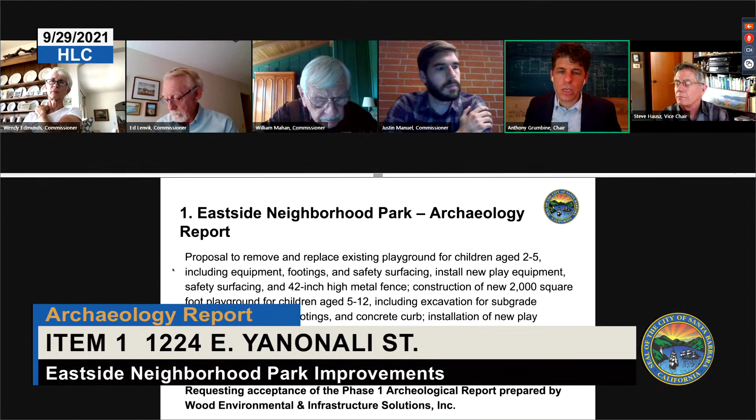This is Eastside Neighborhood Park Archaeology Report. This is a proposal to remove and replace the existing playground for children aged 2 to 5, including equipment, footings, and safety surfacing. Install new play equipment, safety surfacing, and a 42-inch high metal fence. Construction of a new 2,000 square foot playground for children aged 5 to 12, including excavation for subgrade preparation, concrete footings, and concrete curbs. Installation of new play equipment, safety surface, 42-inch high fence, installation of youth adult fitness equipment, installation of permeable concrete paved walkway, removal of chain link fencing and replacement at a new location, and irrigation system improvements. This is requesting acceptance of the Phase 1 archaeological report prepared by Wood Environmental and Infrastructure Solutions, Inc.

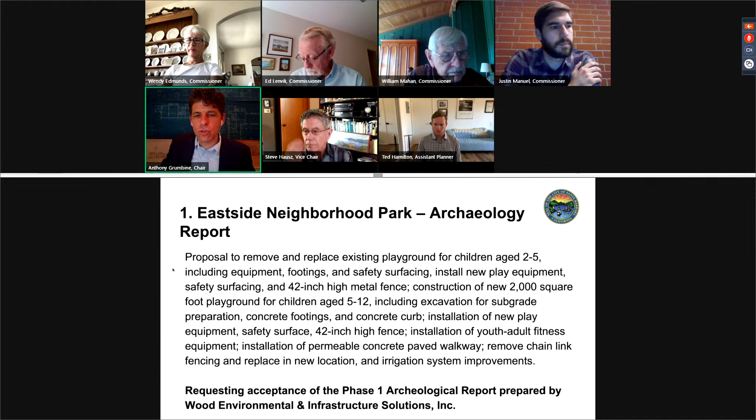All right, so with that, Commissioner Manuel. Yeah, sorry, I have to recuse myself for a conflict of interest with the owner. Okay, thank you. All right.

Mr. Hamilton, do we have the applicant here? Mr. Chair, yes, we do have the applicant here for questions. I don't know if the report preparer is here currently, but the applicant may be able to tell us. I just wanted to note that the overall project will be reviewed by the ABR, and that Dr. Glassow reviewed the report and agrees with its conclusions and recommendations. Thank you.

All right, thank you. And if someone from the applicant team that is here wants to chime in or come on. All right, and if you would introduce yourself for the record. Good afternoon, Commissioners. Denise Johns, Associate Planner with the City's Parks Department.

Okay, thank you. So did you want to, well, welcome, and did you want to give a quick summary of the report findings, and then we can go to public comment, and then we'll come back to the commission for any questions for a motion.

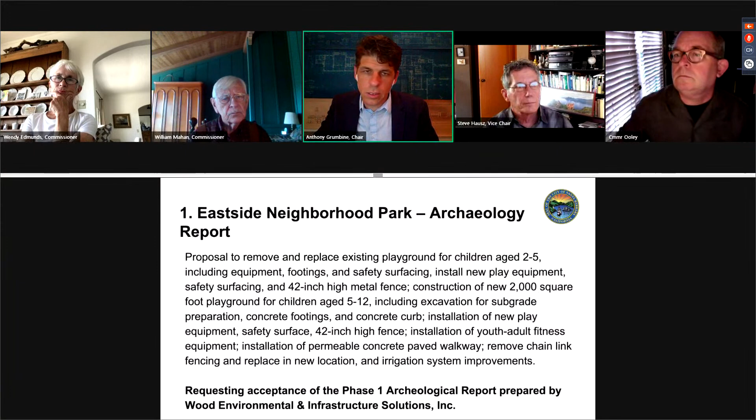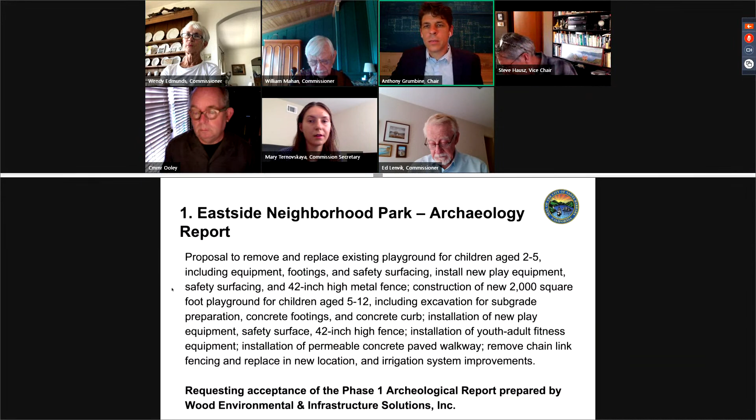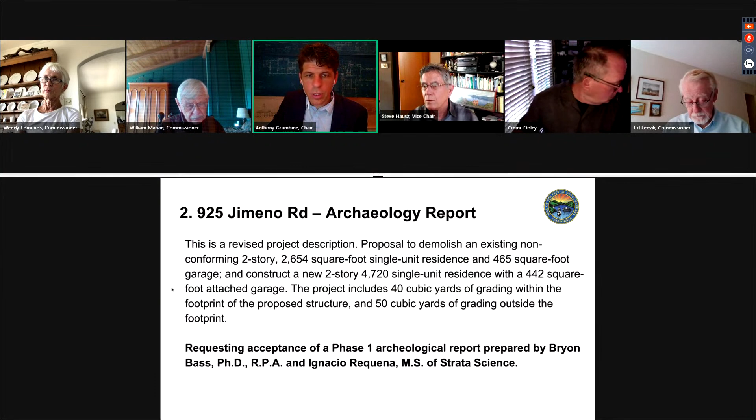The archaeology report for 925 Jimeno Road. This is a revised description, proposal to demolish an existing non-conforming 2-story, 2,654 square foot single unit residence and 465 square foot garage, and construct a new 2-story, 4,720 square foot single unit residence with a 442 square foot attached garage. The project includes 40 cubic yards of grading within the footprint of the proposed structure and 50 cubic yards of grading outside of the footprint.

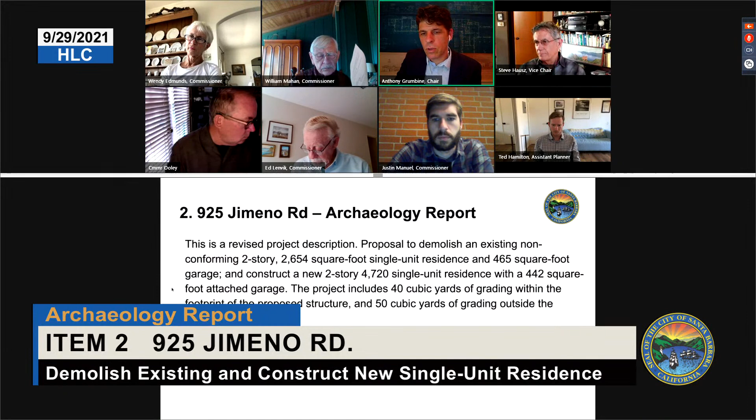This is requesting acceptance of a phase 1 archaeological report prepared by Bryon Bass, PhD, RPA, and Ignacio Requena, MS, of Strata Science.

Thank you, Chair Grumbine and Commissioners. Just wanted to note that this project is under Single Family Design Board purview, so we'll be reviewing the project for project design approval and final.

Dr. Glassow has reviewed the report and agrees with the conclusions and recommendations, and specifically states that the main conclusion he agrees with is that the project should involve monitoring during ground disturbance activities. Also of note is the sandstone block with milling sites located in it, a kind of curious find on the parcel.

And I don't think we have the report preparer here at the meeting, unfortunately. So if there are any questions, I can try to answer them. I did read the report. Just let me know. Thanks.

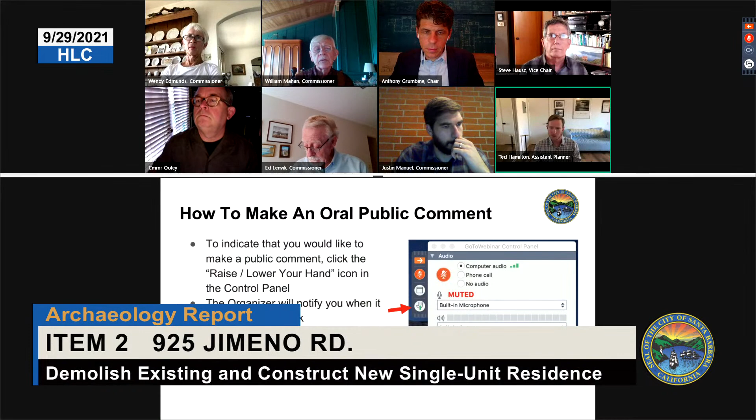All right, thank you. Okay, Commissioner Ooley. Thank you, Mr. Chair. Mr. Hamilton, did the city archaeologists suggest that the report be amended to include some conditions that address the resources they identified, or you were just making a comment?

The city environmental analyst reviewed the report and agreed that the standard condition for monitoring during ground disturbance should be applied during the construction phase. Thank you. All right, any other questions?

All right, in that case, comments or a motion? Mr. Chair, Commissioner Ooley. I will make a motion that we accept the Phase 1 archaeological report for 925 Jimeno Road and also include the standard conditions that the environmental analyst suggested be included. I'll second that. All right. Thank you. Motion by Commissioner Ooley, second by Vice Chair Hausz.

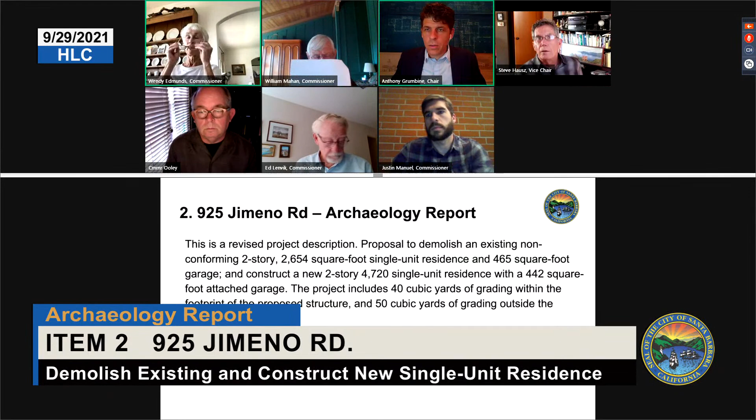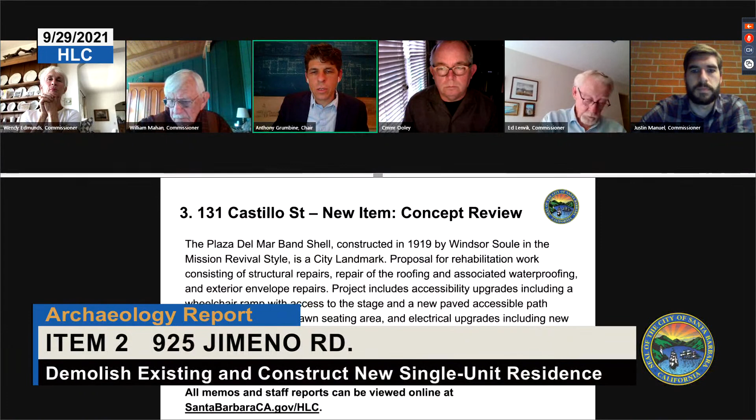All right, we are on to item 3 now, 131 Castillo Street. This is a new item for concept review. This is the Plaza Del Mar band shell, constructed in 1919 by Windsor Soule in the Mission Revival style, is a city landmark. Proposal for rehabilitation work consisting of structural repairs, repair of the roof and associated waterproofing, and exterior envelope repairs. Project includes accessibility upgrades, including a wheelchair ramp with access to the stage and a new paved accessible path between the ramp and the lawn seating area, and electrical upgrades, including new stage lighting and security lighting.

Concept review, there's no final appealable action to be taken at this hearing. The architectural historian prepared a historic significance report and a memorandum evaluating the project against Secretary of Interior standards. All memos and staff reports can be viewed online.

Commissioner Manuel: Surprise, surprise, I have a conflict of interest with the owner and I need to recuse myself. All right. Thank you.

All right. So with that, Mr. Hamilton or Mrs. Hernandez, is there any discussion before we go into the presentation on that? I don't have any. I found that the project meets the Secretary of Interior standards as concluded in the memo. So if the commission agreed, it would meet. Okay, not have anything.

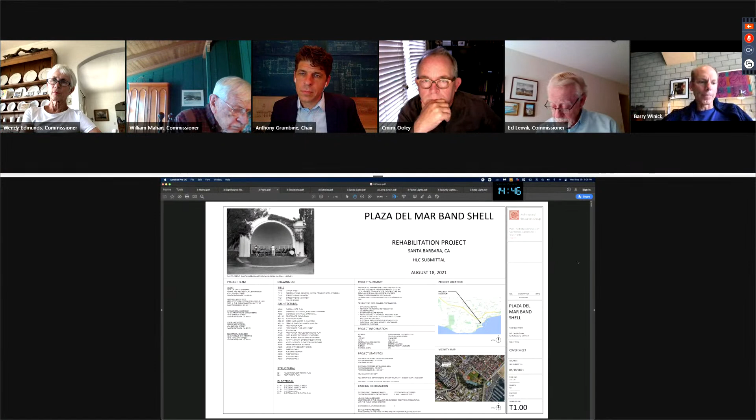Improve the volume, okay. Anyway, the last time we came in front of you was for the Carrillo Gym, and again we had the pleasure to bring up to date and repair an important city landmark. This time we've got the Plaza Del Mar band shell, which was in much worse shape than our last project. This project, unfortunately, from some of the photographs, is lacking a roof.

And it has the unfortunate chain link fence around it just to keep people from a hazard. So we'll be delighted to take down the fence, give this building a roof, a handicap ramp, and restore the colors. You'll see that ARG is great at this - they did the forensic analysis of the paint going back in time to find out what the original color palette was for the band shell.

So anyway, let's go right into the presentation. I think you'll be starting with the existing photograph conditions of what it looked like from the boom lift. This first page is giving you existing conditions on the day they commissioned the boom lift to take a look at the facility. I imagine most everybody's been by it recently - it's kind of unattended.

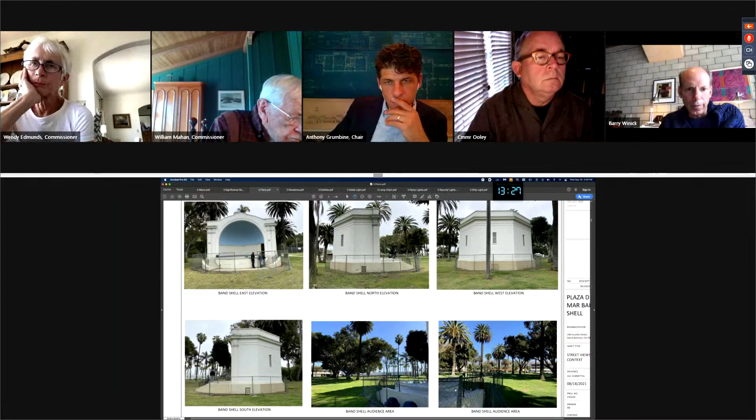Let's go to the next page because they'll start getting the more closer details. So there's the band shell - we've got the elevations from all four sides, and you know its current state. And the next photo is really where it gets to be telling. Series of photos - oh wait a second, that's a separate package page.

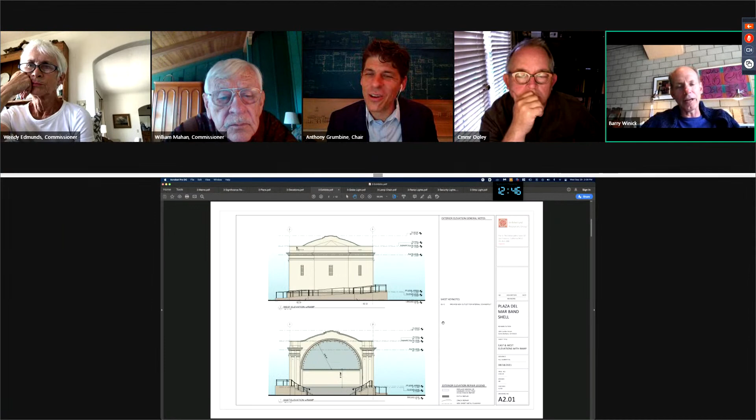We can go through this part of the presentation, but I think seeing the exhibit - well, there's also an exhibit that shows existing photos, but this is showing it rendered with the paint scheme proposed for the band shell. So we just jumped way ahead in the presentation, but I'll go with the joys of virtual presentation. You guys can be flexible - one thing I learned about COVID is flexibility is everything.

So let's start with this - we're going to give you the punchline first. This is what we're proposing. What you didn't get was us taking you through the glossies of all the pictures of the despair. So the proposal, which you can see, is we're artfully wrapping a handicap ramp around the backside of the band shell, so that way you still have that same presentation at the front with the stairs on either side. The handicap ramp comes around the back and delivers the person accessible access right at the top of the stair. From a front elevation, you almost don't know it's there.

The band shell is this off-white - and I forgot all the great names, but these paint colors have great names - that was forensically determined as the original color.

The inside of the shell, upper side, is a sky blue. The lower area, which would normally be like your plinth, is an off-white to brown trending finish, and then the face of the stage...

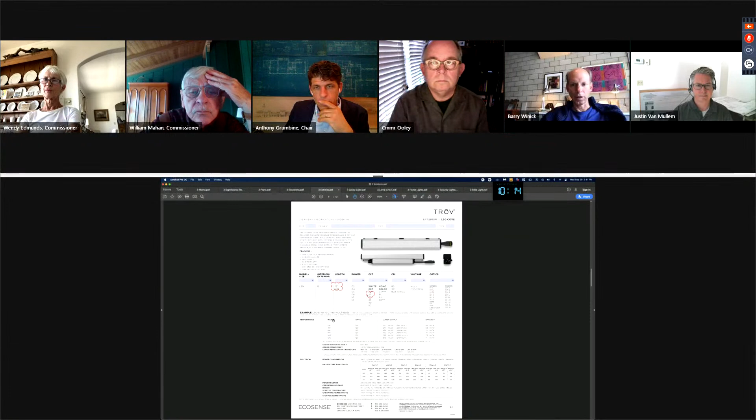I think we've gone into the fixture cut sheets here. Like I said, we're going to go whichever way. So, Barry? Yes, hi Barry. Maybe if we could—we're getting into the details really early, I understand—if we could go to the site investigation photos, I think that's where I was hoping to start. Yeah, it is. So I'm not sure why they didn't come up, but okay.

Mr. Van Mullem, is that the boom lift photo set? Yes, it's the boom lift. Mr. Bolton, if you go to page 35 of the plan set, that's where that starts. Oh, thank you, perfect, that's where I wanted to go.

So, okay, maybe being flexible with COVID didn't work.

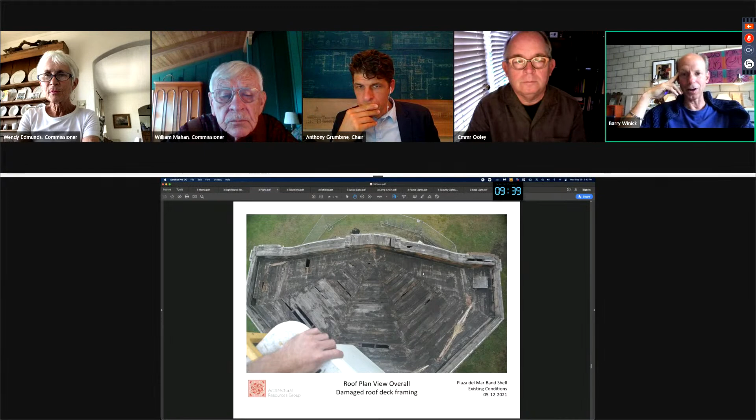So here we go—this tells the story so well. Just go ahead and toggle through and we'll start commenting as we see things. So there's the boom and there is the roof—you can see right through it. And if you're inside the building looking out, you see sky. It literally has no roofing on the planking.

So part of the program is to replace any rotted wood, properly sheathed, properly roofed, the whole building. There's dry rot and damage inside too, obviously with all this water coming in. That's all part of the system—the plan is to replace everything that's damaged.

Next photo, please—that one really gives it away. More of the same. What's good is at least the profiles are still there.

So we do have something to follow, but we just have to replace all the trim. Anywhere that was wood before is being replaced with wood. Anywhere that was plaster before, the spalled plaster is being repaired and it'll be back to plaster.

So it'll be like-for-like materials. And there you go—metal flashing that all needs to be replaced, wood trim that needs to be repaired or replaced.

Okay, it is a sweet building, right? It has these nice details. In some places, like this case, the pediments on the capital are actually in pretty good shape, but you can see off to the left of it, it's totally rotted through and damaged. Here's a case where the Capitals need to be repaired.

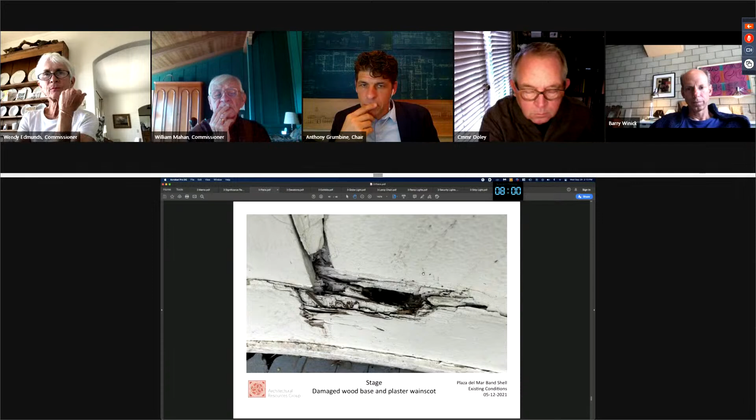Keep going. Spalling concrete also will be repaired. Wainscot, same thing—again, there's going to be a lot of wood replacement. More of the same.

So one thing that—yes, Mr. Winick, we've got 7 minutes left. If we could go into the plan set, that would be fine.

I'll explain why this tape is here. The stage had been built up, so we're now bringing it back to its original height. That also helps facilitate getting the handicap lift ramp in without having to go so high. So sure, let's go to the plan set.

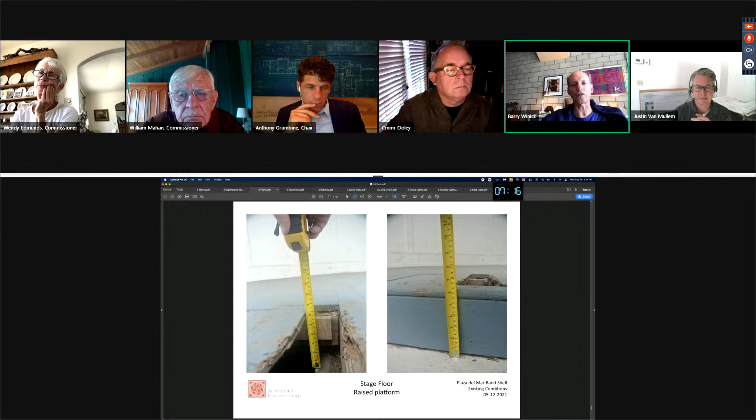The plans—HLC concept only. Okay, so that page you just saw was the forensic study of the different paint samples.

So the overall plan you're seeing now, there's a new travel path being planned to get to the band shell, where there's that little dog leg of the pathway that comes from Castillo Street over to the band shell. The handicap parking is way off to the left by the ball field where it hits the parking lot. That's actually the drop-off point, and there's a ramp that runs the entire distance towards the band shell.

You can go to the next page. So, just what needs to be done for handicap parking. We can go to the next step.

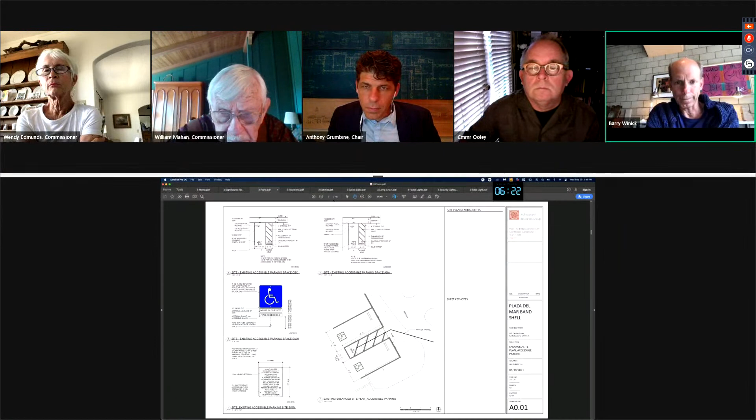The drop off. That's a better example of the ramp or path that leads to the band shell now being proposed and added. That leads to the bottom of the handicap ramp, which starts on the left-hand side, wraps around, and lands at the right-hand side at that stair landing. Go to the next one.

That's a close-up, pretty self-explanatory of the existing. Next, there's your roof plan of the existing. Keep going.

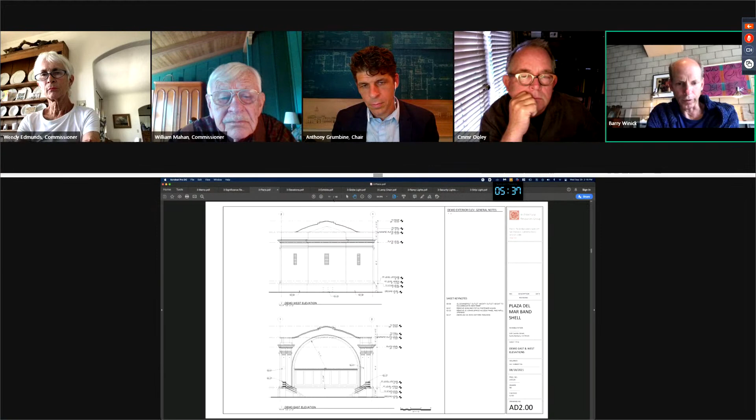Elevations of the existing without the handicap ramp drawn in. You've already seen them with the ramp. Next, please. Side views, same thing. Next.

Okay, and that's showing the existing with the floor finishes. Next.

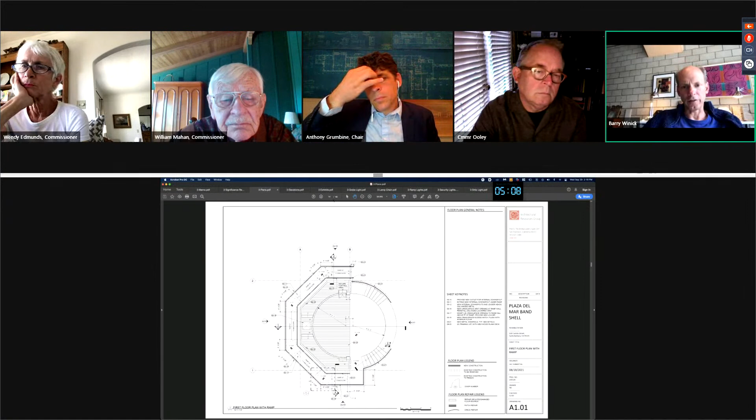Now you finally see it with the ramp added, wrapping around the back side and everything else being restored. But at that new elevation, which is fine. So when I say new elevations, we're back to the original elevation rather than a stepped up stage. And then that next photo, next image.

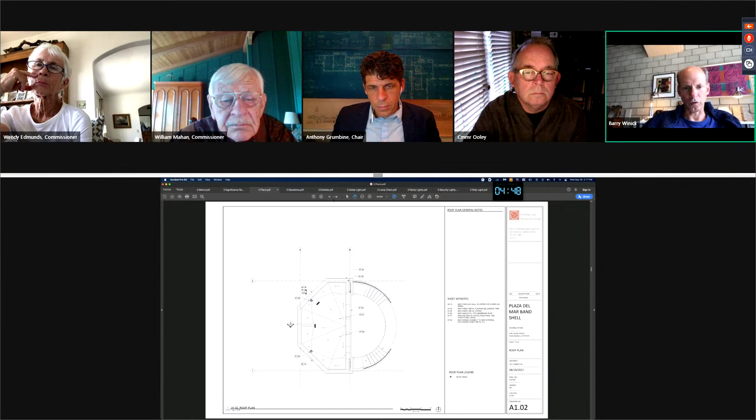Roof plan again, restored roof, proper drainage. Next, please.

And that is the reflected ceiling plan, which starts relating to the lighting. Around the proscenium there used to be basically the theatrical light bulbs you would see there. So ARG has proposed a new light fixture that has a shield on it, an opalescent shield LED fixture, to recreate that same idea of the light bulbs around the proscenium.

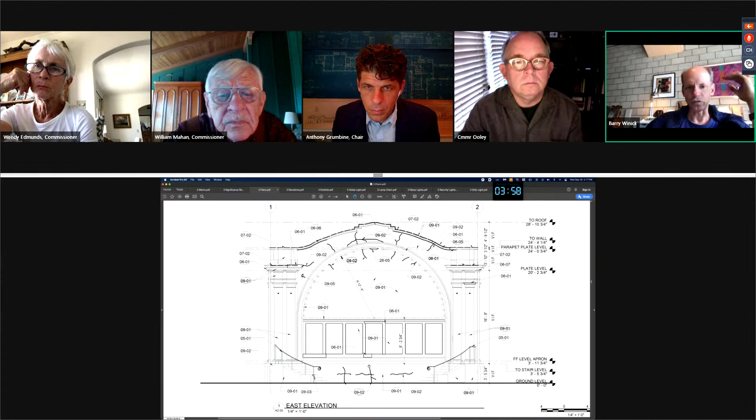Next, please. So you see in that elevation, the lower elevation shows those little domed lights all around the proscenium. It also shows the restored wainscot, the repaired iron or new iron railings, and all the rest of the repairs being proposed all around. They're also showing the light fixtures that give that nice little wash on the building, the same ones you saw in that other presentation sheet. Next page, please.

Side view, front view. I'm sorry, back view, front view. Next.

Trying to get this in 7 minutes. I think we've probably gone over. Again, side view with all the details called out.

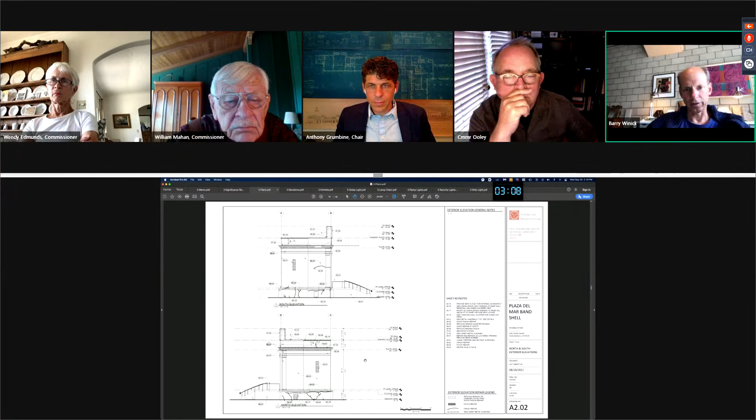Even though we're here for conceptual, this project, if we were farther along in the zoning approvals, planning approvals, we in fact could be back here for preliminary final. Again, showing the railings and the entrance handicap ramp all around it.

Again, next page. Axons, explaining it. I think you've probably gotten that picture by now. Next page.

And now you're seeing it in context with the 3Ds. I think we're pretty much there. We're probably back to the boom lift images, I think, but maybe next page, just to see.

Oh, okay, a cross section. Next.

Again, as I was saying, the details are pretty well developed. So you're seeing the detail through the added structure for the handicap ramp going around the back and the sides, and the ventilation being shown for underneath.

And next page. Again, updated parapet details, proper drainage at the roof. Next page.

And then details on the railing. This railing, I think, is very much like the one at the new Vic. So it's been used in a historic setting in the city before and it's been successful. Next page, please.

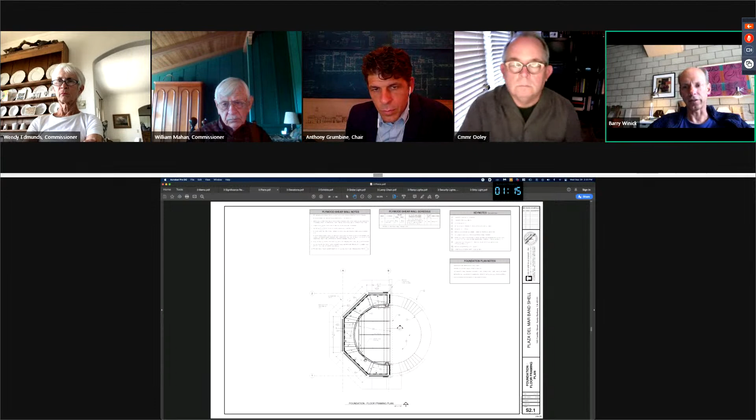Structural framing, you probably don't need to see all that. As I said, again, we're at that point where we could be going at preliminary final. So that's why you're seeing a very thorough set. You can cycle through these quickly.

Since we've got 1 minute and 8 seconds, next page please. So Alan Knoll is doing the electrical. Just forgetting, Jeffrey Haight was the structural. So again, we're working with people in town who are familiar with doing historic restoration, know the ropes.

Okay, now we're back to the boom lift. If you wanted to see those cut sheets on the lighting, we could go back to that other presentation, or basically go to you guys for comments. So that's the light. Jason, you can, if you want to say anything about the lighting, be my guest.

I think these are Ecosense LED lights, 2800 Kelvin or 2700 Kelvin in this case. That would be the proscenium lights.

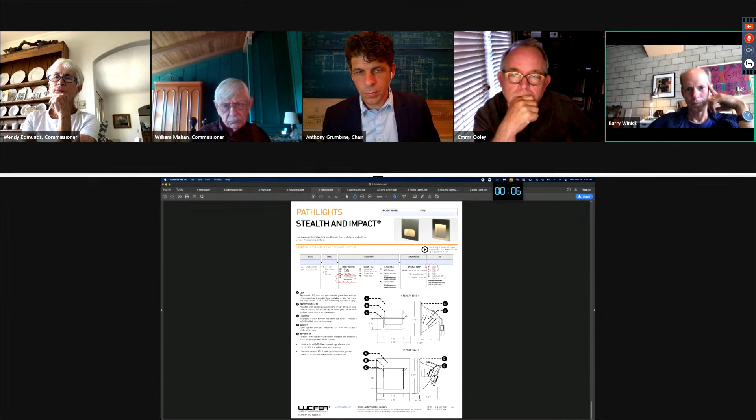So this one is the motion sensor light for security. Exactly. And then these would be step lights around the side, where the handicap ramp is, on that low plinth side, as well as along the side of the steps. I think that's it.

I think that's it, all right. All right, 15 minutes for comments, I guess. Thank you, great, sorry to rush it so much. Oh no, that's good, a lot of drawings to go through.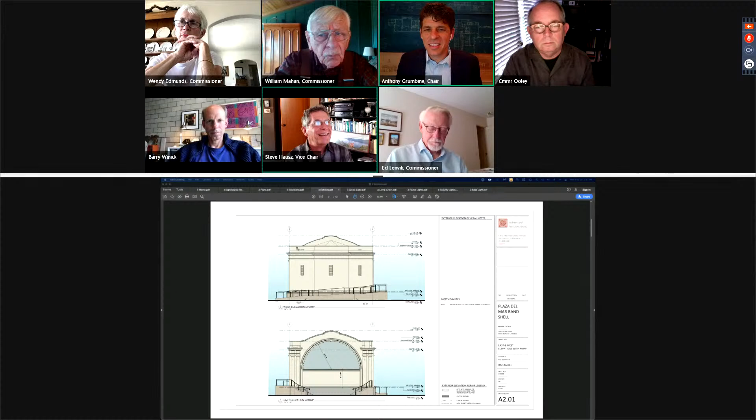Mr. Chair, question. Oh man, Vice Chair Hausz, you beat me to it. I'm so sorry, I have— A question about what else? Lighting. So if we could return to the lighting page.

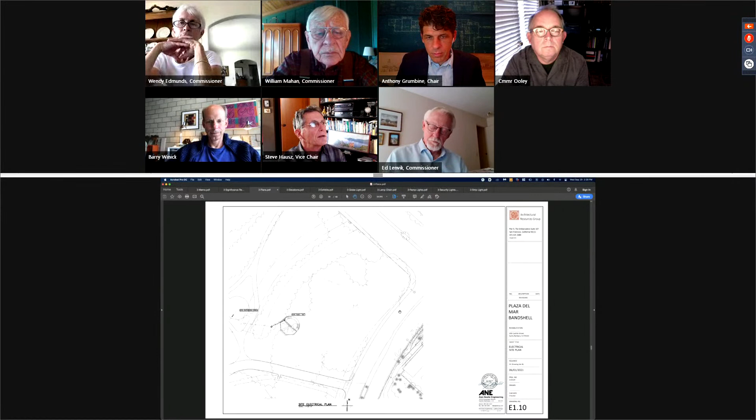The cut sheets that show the fixtures. Oh, that was on the colored presentation. Okay, yeah, because it's not in the set that we had access to. Sorry, we did submit this a little bit afterwards.

Now what are these fixtures? Oh, those are cove lighting? Exactly, yeah, those are cove lighting. They're going to fit in behind the proscenium along the arch and just give a little bit of a wash on the dome. And those are LED as well? They're LED with a warm color temperature.

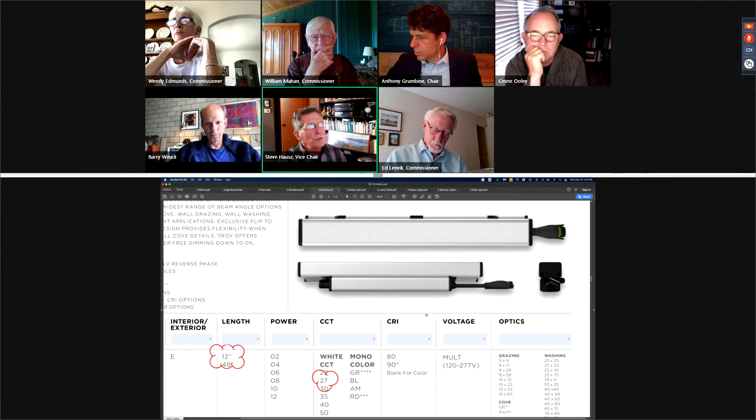And then if we could go to the exposed lamps in the proscenium, I think it was the next page. There you go. So I would have expected to see something with a clear envelope with the filament exposed, but these days it's LED.

I'm not sure if you have any information on what kind of lamps they originally used, but the appearance of these just looks so contemporary. I can't remember the configuration of the lights I'm thinking of. They could be globe lights, which is a G like this, or sign lights, which I think is an S9 or something like that. I'm just wondering what your thoughts are on using this with the translucent envelope and that opaque part next to the threads.

I can start, and whoever from the applicant wants to finish can answer. Okay, well I'll start, but Justin can finish. The opaque part will be tied up against the building.

The original lights would have been, I think, what we all imagine are just the old regular Edison bulbs. I think the thinking behind this is that the city has rules that you're not supposed to see bare lamps, so this is a frosted light fixture. If you felt that an exposed globe, because of the historic significance or compatibility with the original structure, made more sense, we'd certainly be open to that. This was more trying to be in compliance with current ordinances.

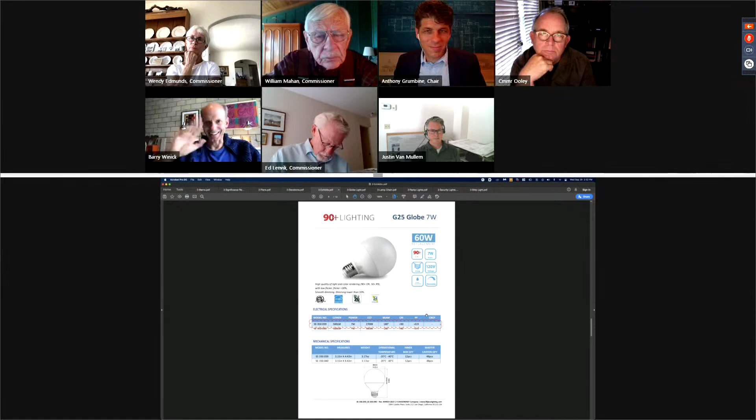There's not - what's the word - rehabilitation that needs to be done on the band shell itself, is that correct? Well, there's foundation work for the handicap ramp. Right, okay, but I'm talking about the band shell itself. Right, so on the band shell itself where there's spalled concrete, that's being repaired, but we're not tearing out major amounts of concrete and replacing it, if that's what you're asking.

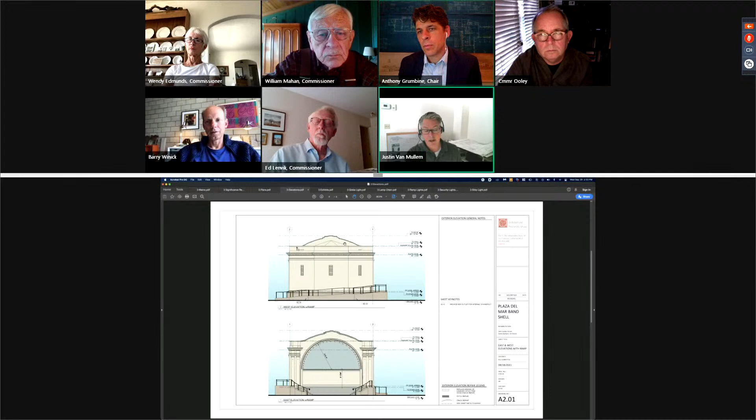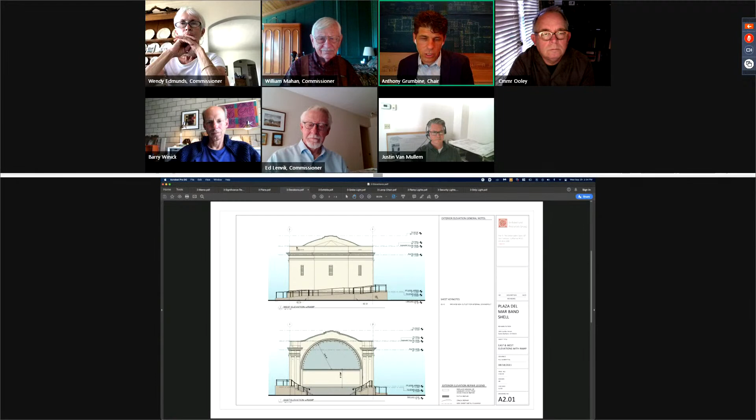All right, other questions from the commissioners? I have a question regarding the - so if you can zoom in, this is a good spot, if you could zoom in either of the elevations, the front elevation actually. Let's start with that. So regarding the handrail and guardrail, what's going to be the requirements? Well, why don't you tell us about the requirements, what has to be, and then also about pickets or no pickets with that height, and are you using historic building code, or how is that whole thinking?

Is it not so tall that you need the pickets, or how is that getting around it as well on the platform?

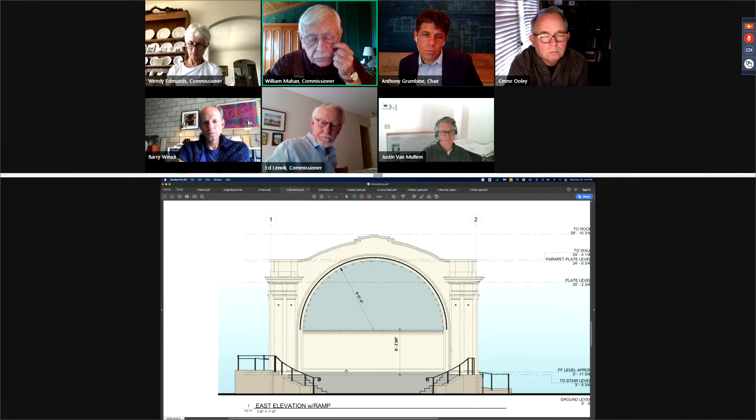Sure, yeah, Justin. Thanks. There's a code exception for guardrails on ramps adjacent to stages. The top portion of the ramp is high enough that you would normally be required to have a guardrail, but there's an exception to that requirement for stages and for stairs and ramps adjacent to stages. So we're just showing the required handrails and no guardrail or pickets, as you said.

Great, perfect, thank you. And then I had another question regarding the ramp, and this ties to the idea brought up by the public comment person about symmetry. Obviously it's a very symmetrical structure, but was there consideration for setting off the stairs symmetrically? In this case, the bottom left corner is the only spot that's not symmetrical, because everything else plays out with the landing at the top of the ramp. Was there consideration for giving it a little setback of a couple inches or something to differentiate, so that you have perfect symmetry on the stairs going up, and then just the side piece on one side of the landing and the beginning of the ramp on the other that are asymmetrical? Was that option looked at or thought of?

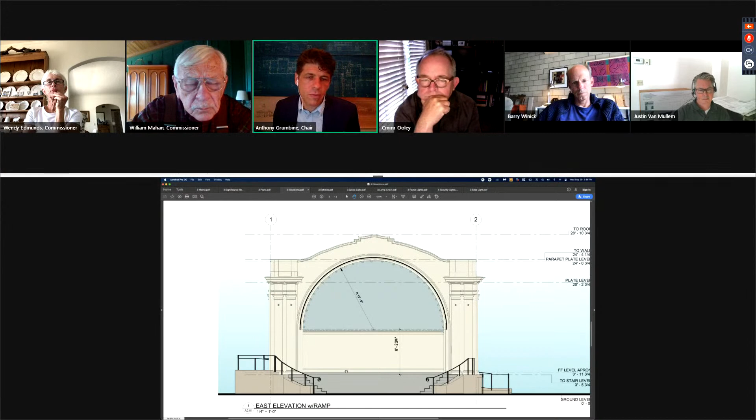And then tied to that is also the color question. Was there a thought about a potential other color for the ramp, a slight differentiation or some other way of differentiating what was original from the ramp addition, or any thoughts along those lines?

I mean, the idea of a different color for the ramp hadn't been considered, and the configuration of the setback, we can certainly study that. I don't think we did study that.

I think we could. My personal opinion is that the ramp color, although it's nice to know the history of something, the ramp actually becomes less of an element if it blends with that pedestal color you're seeing on the side of the stairs. So I'm not so sure I would advocate that. I think the step back that you suggested, if there's enough room in the plan for it to work, even if it's only 6 inches, I think that could be valuable.

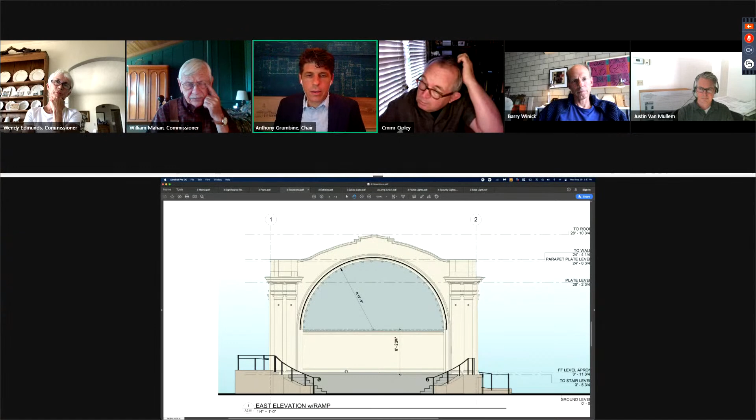Okay, thank you. And then I have one question about the ventilation underneath the ramp. I don't know if it's best to go to the details page for that, but I just wanted to try to understand it a little better. Maybe it wasn't as clear in detail or elevation as to how that's all happening and what that material is. Is that concrete, or is that framing and then ventilation? Well, I think they can zoom in on it for you.

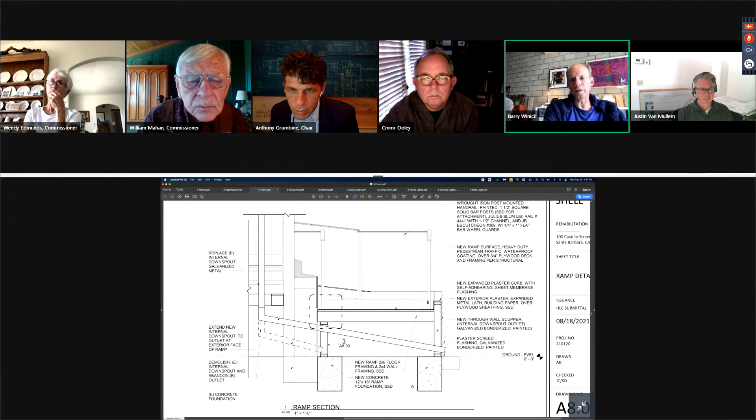And this is just to air out the crawl space. Yeah, it's just passive ventilation. Oh sorry, up to the left was the detail that had the vent showing. That one, yes, thank you. So there you go. Okay, so it's louvered, there we go.

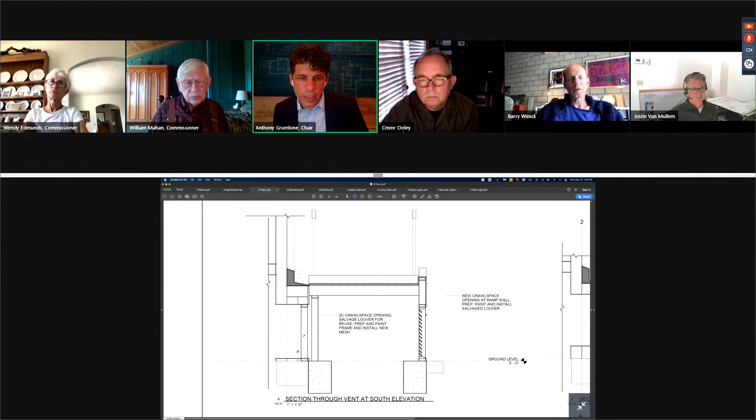Okay, the louvered vent is on the wainscot of the existing building. Where the ramp is high, we're moving it out to the face of the ramp, and where the ramp is low, it's just the existing one. Okay, so that's an existing louvered vent, at least designed there. Okay, and then you're moving it out to that outer face. Got it, okay great, all right, that was it for my questions.

Okay, thank you. If you could go back to the front elevation, please. In response to the comment about symmetry, had you explored the beginning of the ramp with an entry that is not seen, so that it looks the same on the left as it does on the right, and you just enter it from the side rather than the front as the beginning of the ramp, to ensure that it has symmetry?

Yeah, I think I'm understanding kind of like a little screen wall that would be the same height as the high side of the ramp. Yes, and you enter it from the other side. Yeah, we did—I don't think we did study that. I mean, there were all kinds of other studies with the ramp all on one side and stuff, but that could be interesting.

Justin, what do you think of that? It seems to make sense. Yeah, I think it is.

There's a historic photo on the front cover sheet that gives a sense of this. It has less of a presence when you've got a full audience in the lawn area, so my thought was, since it's not going to be highly visible, fewer elements. But I think a small screen wall there could work. We could study that.

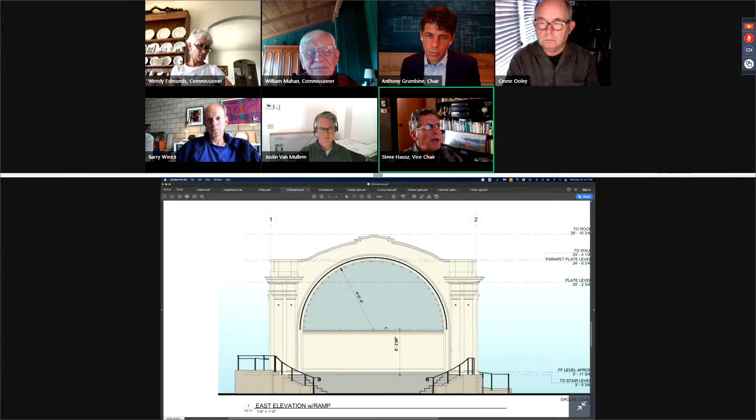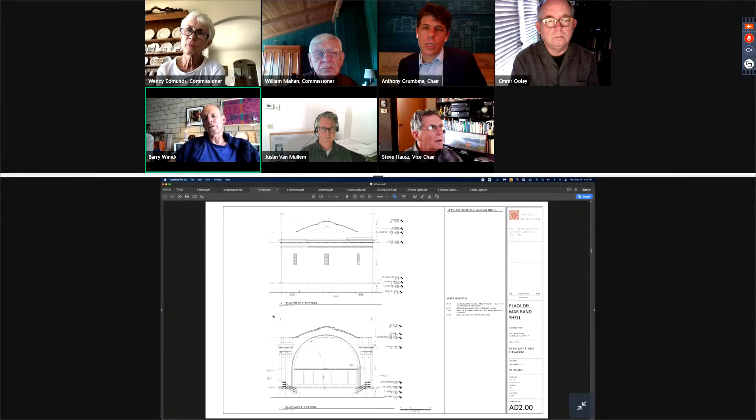I was just reminded by the historic photo that behind the orchestra, below the dome, there was paneling on that wall. Maybe you addressed that earlier and I didn't hear it, but I also see it on page AD2.00, it's depicted. Is that something non-original? That is original, and most of the elements are there, so that's part of the repair. It's just not in the rendering, but the way it's rendered is that it would just be one singular color rather than the two colors showing up in that photograph. Okay, so the paneling would be there.

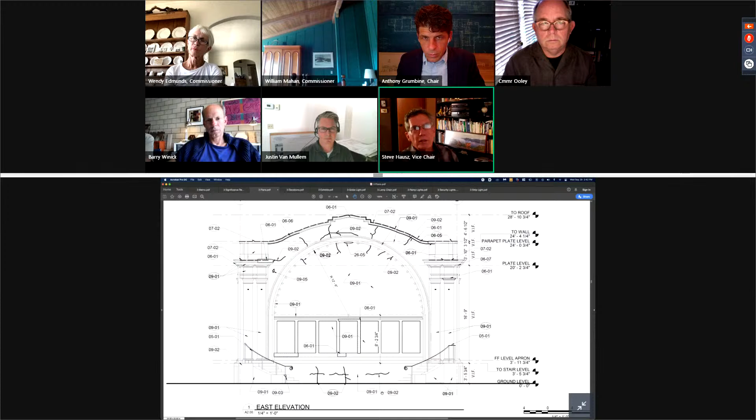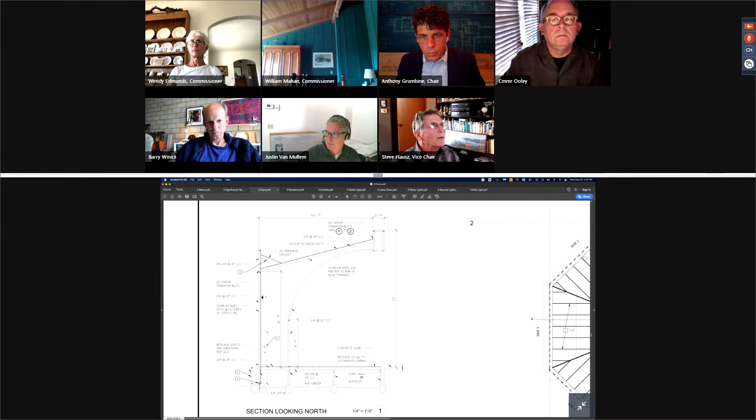And do you have a section through the top of the proscenium that shows how those lamps are mounted and exactly what one would see? Which page would that be on? Towards the end, there's a section. The marquee globe lights were an original detail, so on the bottom face of that arch, the receptacles are still there, and we're proposing to reuse those. I think, Mr. Bolton, it was back four or five pages — there was a section. Try page 23. Yeah, I don't think there's an enlarged detail.

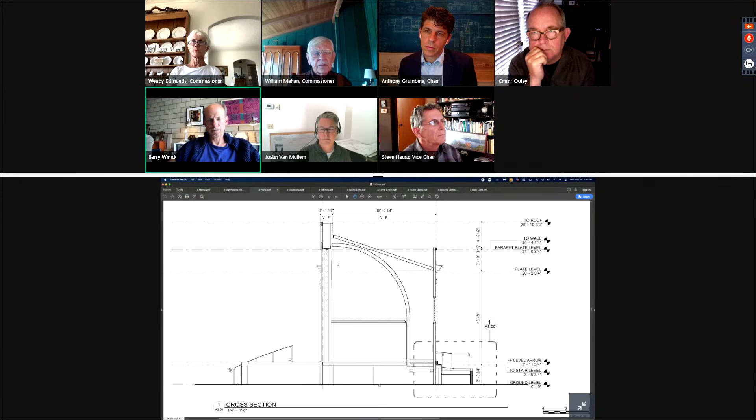All right, any other questions? My only other question about these lights is, will they be on a dimmer? Yes, they're both on a dimmer. Okay, thank you. Any other questions?

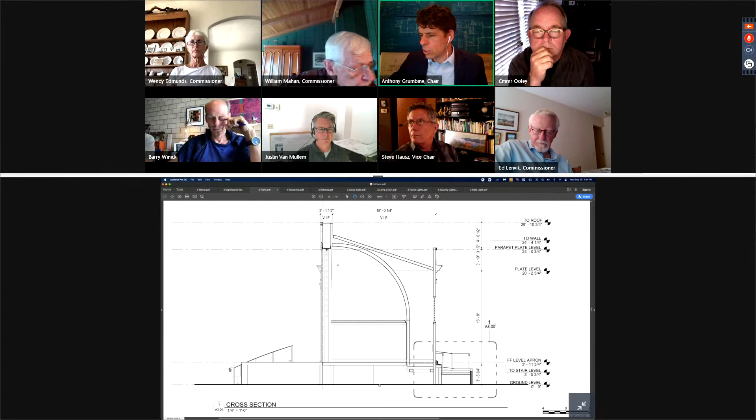All right, in that case, let's roll into comments. This is not on for either preliminary or final approval, so let's give comments that are good direction for moving things forward so they can come back. Mr. Chair? All right, Commissioner Drury.

I love this idea. I'm very pleased that Mr. Winick is the lead on this — I know it'll be done absolutely properly. I think Commissioner Ooley's comments and questions were on the money in terms of the symmetry aspect of the project, and that should be studied. I also think the railing itself should be studied. I'm particularly concerned with the visuals of that big scroll at the end of each rail — it seemed very intrusive, and it kind of gets in the way of looking at the stage. I know this is a drawing and it may disappear in real life, but it seems to be just a little too much of a note.

So I think the railing should be studied, and I'm not sure there was a railing beforehand in those old drawings and photographs. Anyway, my comments would be that Commissioner Ooley's question should be studied, and that the railing should be studied as well. I think visually that scroll at the end is obtrusive or intrusive. Thank you. All right, thank you, Commissioner Drury. Who wants to go next?

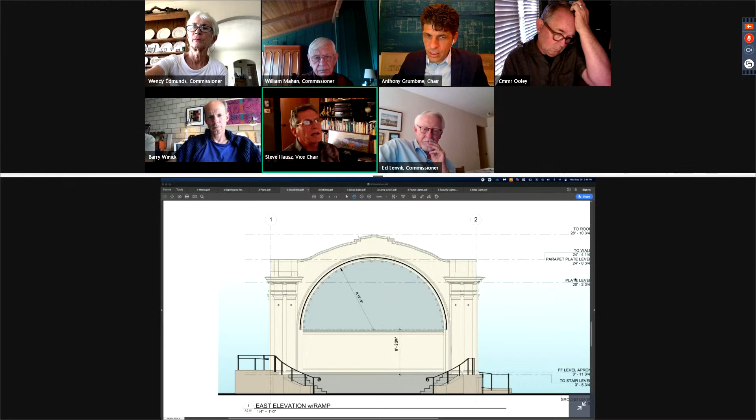I'll jump in. I'm just still not convinced about the lighting, and my feeling is that it's going to be on a dimmer, so regardless of whether it's a frosted lamp like they're showing in the plans, or a clear envelope with an LED filament look, I think the light level can be adjusted so they'd have the same effect either way. I just feel the clear envelope is more traditional and commonly available, so that's my comment about the lighting.

I would tend toward that. As far as the asymmetry of the ramp, I don't know, it's kind of six of one, half dozen of the other. We can't eliminate the ramp, so that element is going to be there. It's an imposition, a design challenge as it's drawn now with the asymmetry introduced. But I'm not convinced it's necessarily a better solution to have yet another massive element balancing it on the right.

So it kind of announces that this was a modern addition necessary for access. As for the volutes on the railing, I don't know if they'll actually be perceived as strongly as they look in this drawing, but if the historic building code would allow you not to have those, and instead just have the end post out a little further to meet the code distance past the last riser, maybe that's a better solution.

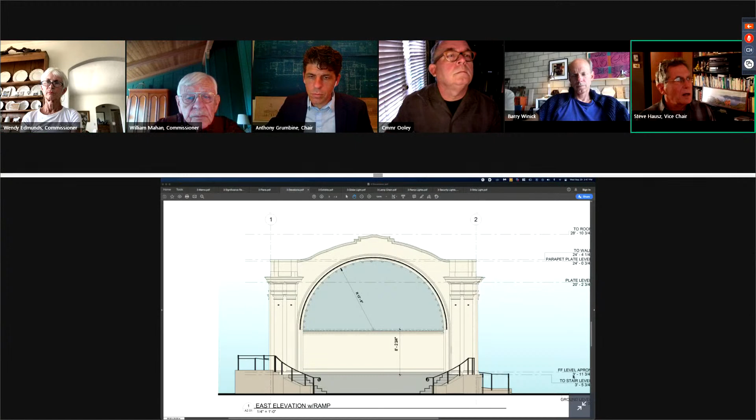So those are my comments. Oh, other than to say I commend you on your usual high standard of presentation. This is just really excellent. Thank you.

All right, who's next? Commissioner Mahan? Yeah, thank you, I agree with the compliments to the architect. I think the issue is that this building is really very classical, I'd say Roman in its classicism, and the problem people are having with the railing is that it's Spanish colonial revival. We need a Roman railing.

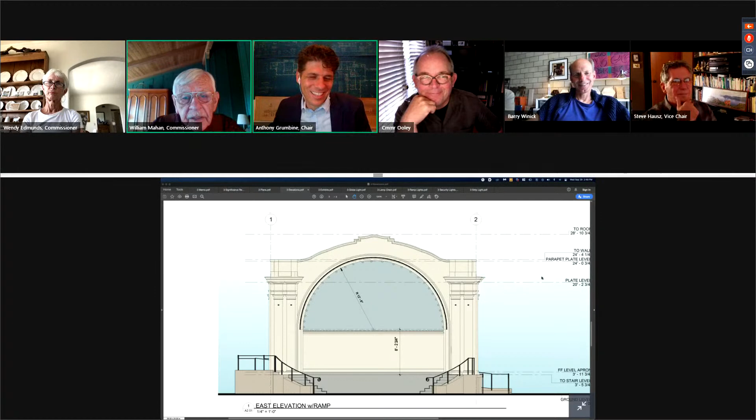I think Mr. Winick should study Roman architecture and see what kind of railings they used — I can't describe it verbally, but it would be set in a balustrade, set in stone. Commissioner Drury is going to be happy, it will be set in stone. They did railings and they weren't in iron, they were stone, or they'd look like stone.

So I think that's the problem — we're going from Roman architecture to Spanish architecture, and that's the hook that has to be corrected. We'll look at it. But generally speaking, I think this is a very fine project and a beautiful building. I didn't really appreciate it until I saw these drawings, and it's wonderful. I also agree that moving the handicapped access door to the side to maintain the symmetry is a very important comment.

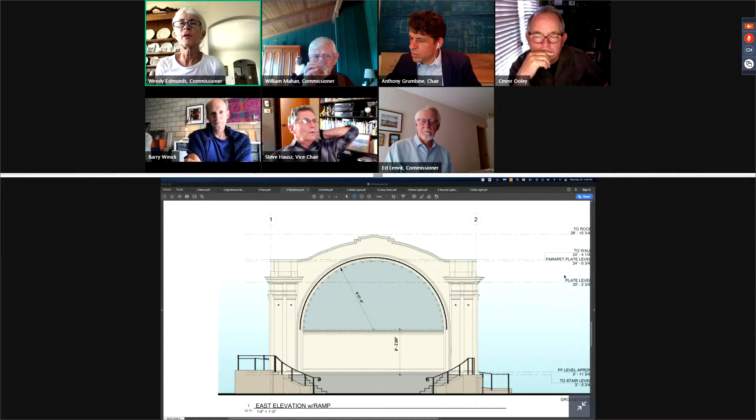Thank you. We've got two in favor of that. All right, Commissioner Edmunds. Thank you. I too appreciate this project — this is such a beautiful piece of architecture and so underutilized right now.

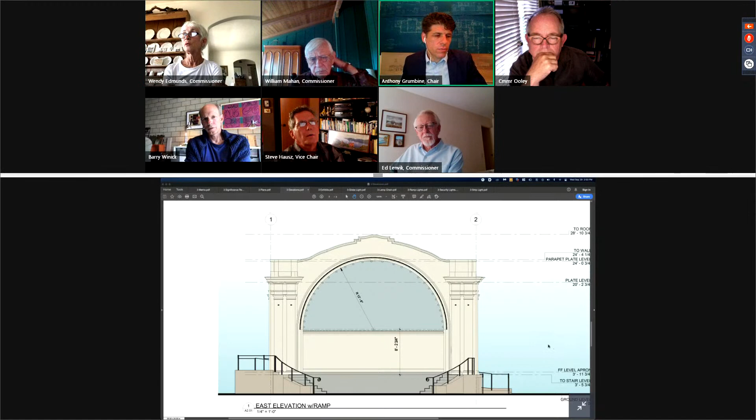Other comments? Commissioner Ooley? I'll join the chorus of accolades to the design team. Whenever we hear you've got to add an ADA ramp, I just kind of shudder because oftentimes they are just miserable executions of trying to comply to ADA. This is very clever that it wraps around the back and almost is invisible from the audience side.

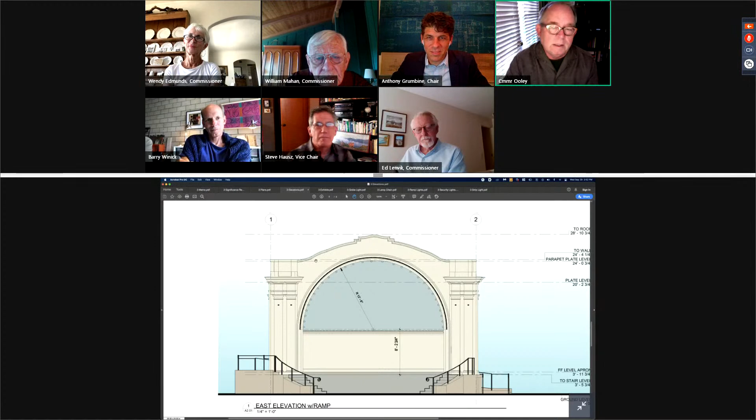Seeing these drawings when I was reviewing it reminded me of a pizza party I had there 20 years ago, with a little transistor radio and Rusty's Pizza delivering pizza for a little birthday party we had there. And it was so enjoyable even then. So I look forward to it being activated and made a part of an active enjoyment for the community. Totally supportive of the project.

I think well thought out, well executed. The rail does need to be studied, maybe just more square kind of expression instead of the curly cues kind of a thing. Just make it really simple. Might solve the problem, but thanks for the city pulling this together and bringing it forward.

All right, thank you, Commissioner Ooley. Other comments? Vice Chair Hausz? I have one final thought on that lighting in the proscenium. With clear glass envelopes, they will pretty much disappear in the daylight as opposed to a whole bunch of white orbs there. So I think that's another strong argument for having clear glass envelopes.

So you're not in favor? Mr. Chair, so you're not in favor of the twisty, curly fluorescence? Oh, please no. We'll be delighted to come back with clear lenses. I'm convinced. All right, all right.

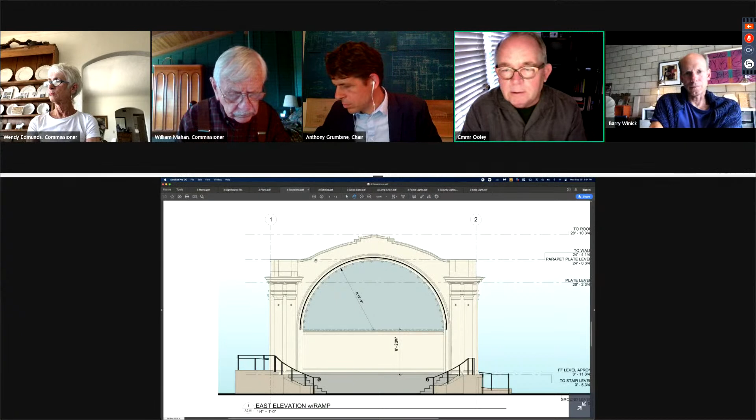Commissioner Ooley, one final comment. With the maturation of the drawings and how far along they are with this, I'm really supportive of it. I think we could suggest that they get PDA. I don't know what other steps you have, Mr. Winick, to get through zoning or anything else, but I think you're very much there. Just some minor little tweaks I think you've got to work on before you bring it back, but I think it's ready for a PDA. Great, thank you. That's right, that's what we'd like to do, come back for that.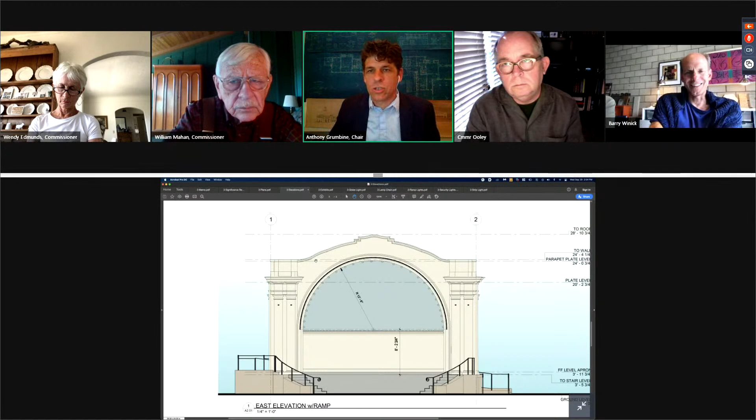Okay, so with that, I'll wrap in my comments here. And I just echo what everyone said so far. This is a great project. We're very happy with how everything is going, with a few minor tweak areas that people have mentioned, and I'll summarize in a second. The only additional comment I would say is that this is an interesting struggle because this is one of the high classical buildings, as high classical as Santa Barbara gets in terms of our architecture. LA or San Diego or other places usually get much more fussy with their classicism.

So this is one of our few, fairly developed classical orders. As Commissioner Mahan mentioned, it's Roman, at least in its tie and character. It's Mission Revival, I think, properly analyzed, a higher classical form of it. The handrails are a big question, and studying a more Roman approach, but also a more Mission Revival approach, maybe looking at some Mission Revival precedents, there might be a wrought iron that is a little bit more sympathetic than just simple, or it might end up being just simple is the way to go. I don't think there's an obvious solution, but there's maybe a chance to look a little deeper at some connected precedents, and maybe there's a Mission Revival answer somewhere that helps with that.

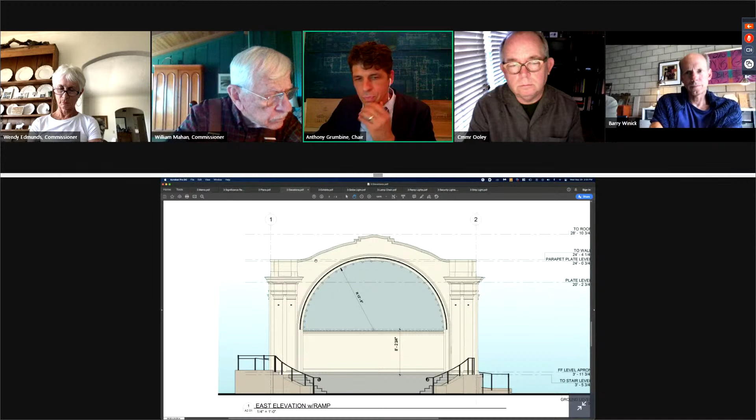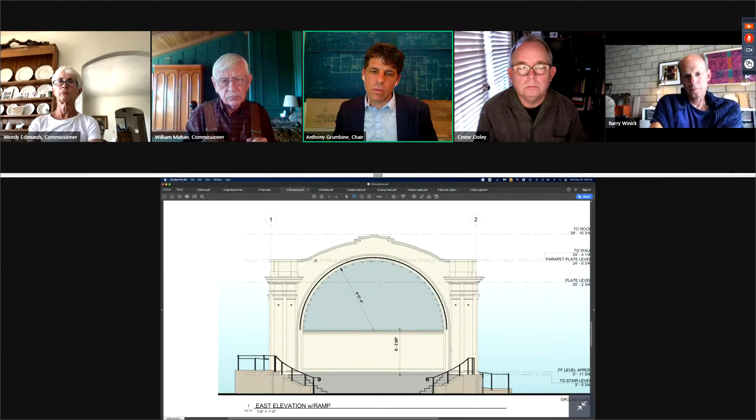So then let me summarize. I agree with the symmetrical comment as well, at least studying it. I definitely don't think this is a bad solution. I think it's a very clever solution to wrap the ramp, and I don't think it would be offensively asymmetrical, although there might be a slightly better symmetrical solution out there in my mind. So those are worth studying, along with everything mentioned about the wall on the other side, or just a bump in the ramp. Maybe come back with a perspective that matches the view of the original photo, because that could be a good comparison. I know you already have a model going, so a good visual comparison for us to understand how the stairs are going away from us, and also how the railings and everything works, how it looks from that view.

Okay, so let me summarize the comments. Hold on, let me just drop them down. Okay, so in general, we're very pleased with the project, the architect and team, and we think that it is ready to be coming back for PDA with the following studies and comments.

So to study the symmetry of the structure from the audience, especially from the main audience view, trying to get it more symmetrical, and recognizing that there's a challenge with the accessible ramp, but maybe there's a better answer out there that's a little more symmetrical, including but not limited to studying mirroring the wall, the ramp landing on the left side, mirroring it over to the right side, or other solutions.

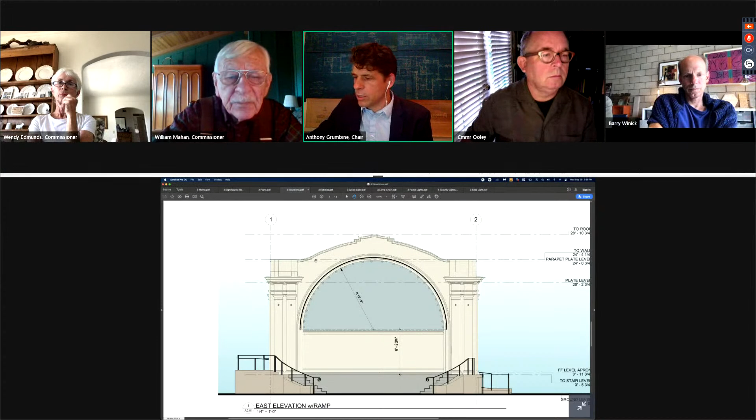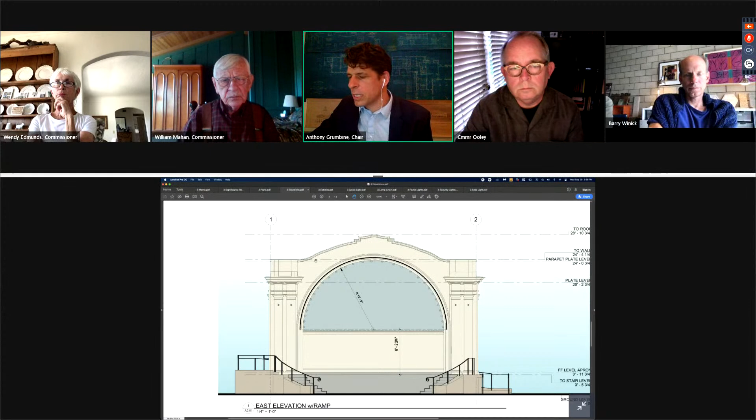To study the wrought iron, the scroll or lamb's tongue, however that gets implemented, or study a more Roman solution to the railing, or more mission revival solution. So to look at those with the railing in mind, the lighting is the clear bulb lighting. Historic clear bulb lighting is favored and is recommended. So to look at a solution that involves that and that's close to the original as possible in terms of the look.

And then also the other additional note of the design in general, the ramping or the wrapping of the ramp is seen as a very clever design, and is looking like it will be the minimal impact for the build of the historic landmark. So any other comments I missed?

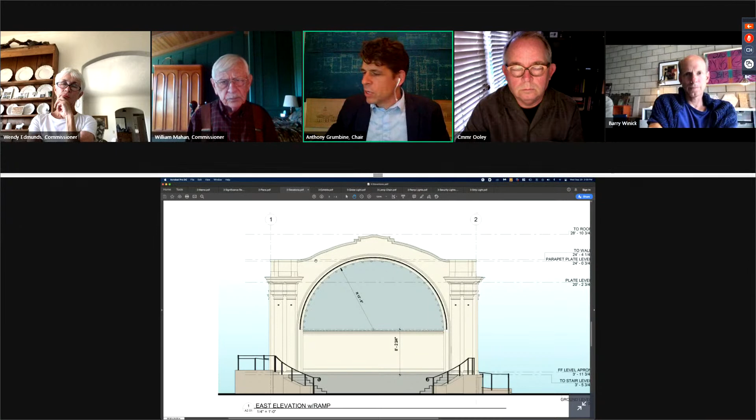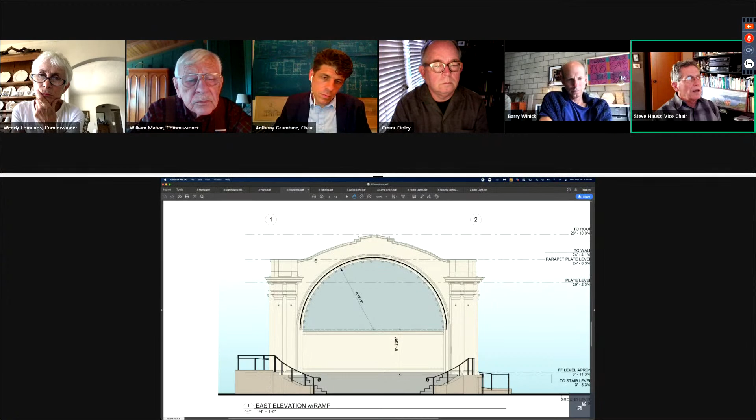Hearing none, Vice Chair Hausz. Yes, I just noticed something I didn't notice before, and I don't recall anybody bringing it up, but at the landing of the ramp on the left, it appears there's a curb coming up from the ramp surface, which just makes the thing have all that much more mass. And if that's because of ADA requirements, I think an alternative is a horizontal bar at two inches up or something like that. So I think anything that can be done to lessen the mass of that would be a benefit.

Okay, good point, I see it. And the applicant team, was there any comment or response on that? Is that correct, or the understanding that that's where it was going? Mr. Chair, that's where the lights are hidden, and that curb lights that ramp. So you would then have to see those lights on the opposite side.

I'm thinking it would be a good suggestion to study an alternative location for the lights, because I hate to see this additional mass just because of trying to hide some lights. So if there's another solution, let's add that as a comment to study and see if there's another solution for the lighting that doesn't increase the mass or the height of that past the stage height or the last step height.

Okay, any other comments? All right, well, is anyone willing to make a motion with that?

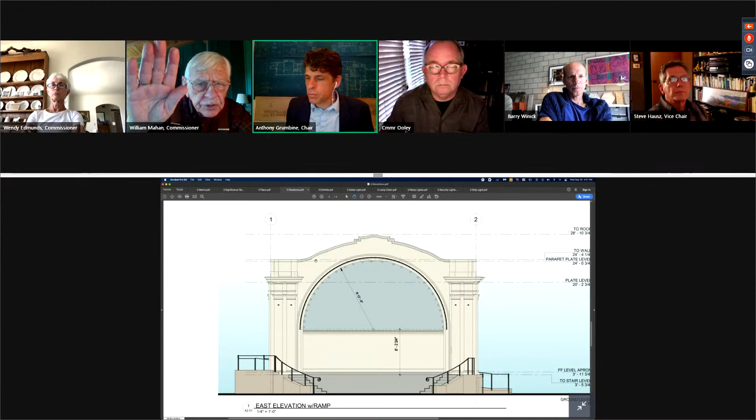Commissioner Mahan. Mr. Chair? Yes, Commissioner Mahan. Yeah, incorporating those comments, I'll make a motion for an indefinite continuance.

Second. Tie goes to the vice chair. I'm good with that - that's why he's being paid more. $51, right, for me. All right, so motion by Commissioner Mahan, second by Vice Chair Hausz.

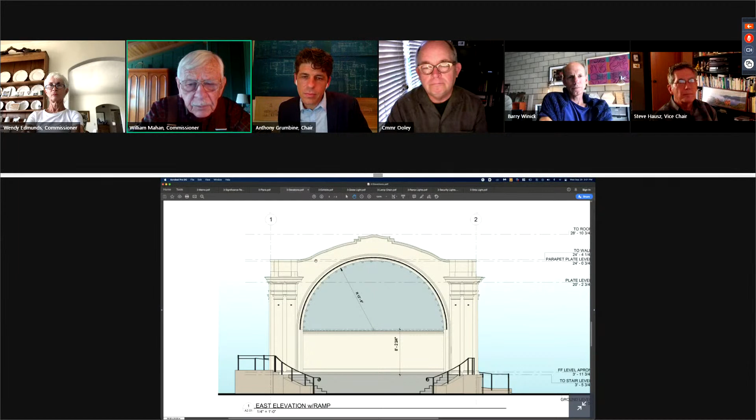And under discussion, any discussion? Our compliments to the design team. I think they're really proceeding in the proper direction, and we're very pleased with this first look at the project. Yep, absolutely. Thank you. All right, thank you. Any other comments?

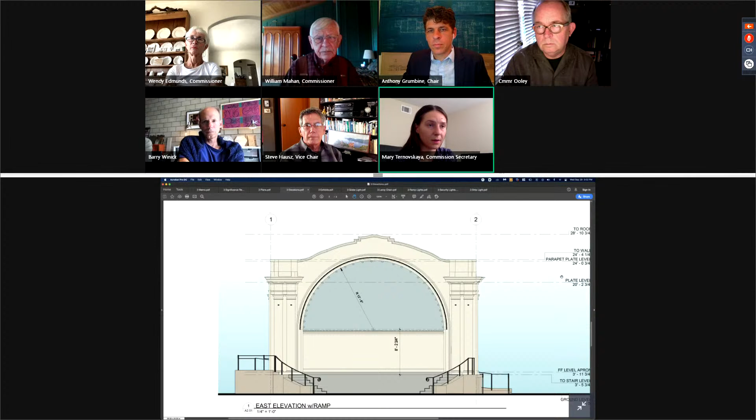Okay, let's have a roll call vote, please. Commissioner Ooley, yes. Commissioner Mahan, yes. Vice Chair Hausz, yes. Commissioner Drury, yes. Commissioner Edmunds, yes. Commissioner Lundvik... was there, did we lose them? Okay, I'll go ahead and move on to Chair Grumbine. Yeah. All right, the motion carries.

Thank you, everyone, and yeah, very nice project. Thank you, thank you, see you all next time. All right, and we almost did it - we almost did it before 3 o'clock, but sorry everyone, we just barely missed it. We could have had the first HLC meeting I've ever been on that ended before 3 o'clock, but we didn't. Commissioner Drury can get home and start cooking.

He can do lasagna. Sorry, it better be a good dinner for Mama - that's a 3-hour dinner, it better be like 7 courses. He can do lasagna instead, it's going to be a big meal tonight. That's right, steak, beef bourguignon, I don't know what all. All right, everybody, sounds good. See you in 2 weeks. Meeting adjourned. Bye, thank you.